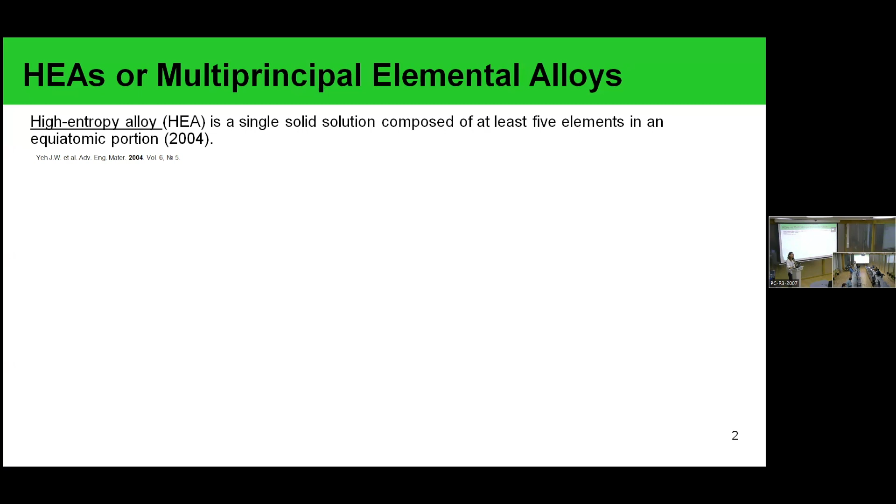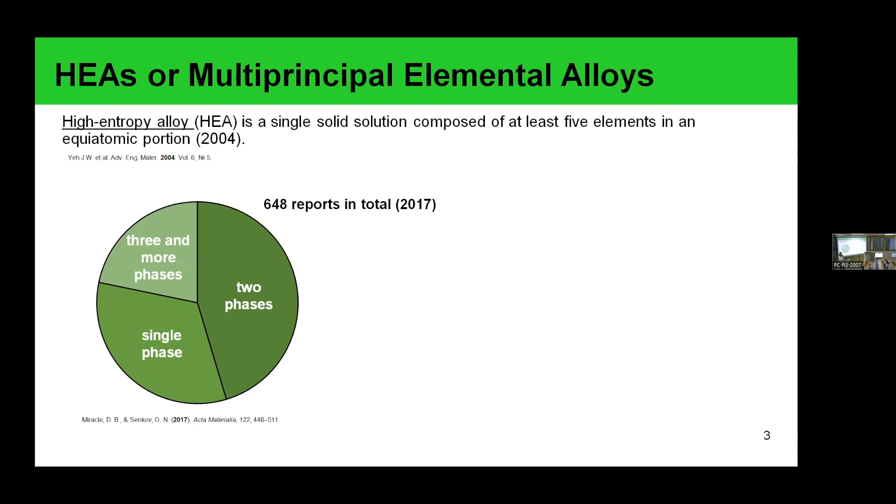Starting from the definition of high-entropy alloys, they were first published in 2004. According to the general definition, these alloys are a single solid solution composed of at least 5 elements in equiatomic proportion. But according to reports reviewed in 2017, there are more than 600 reports demonstrating that these high-entropy alloys contain at least two phases. Today, high-entropy alloys are considered mostly as a new approach in alloy design rather than following the strict definition.

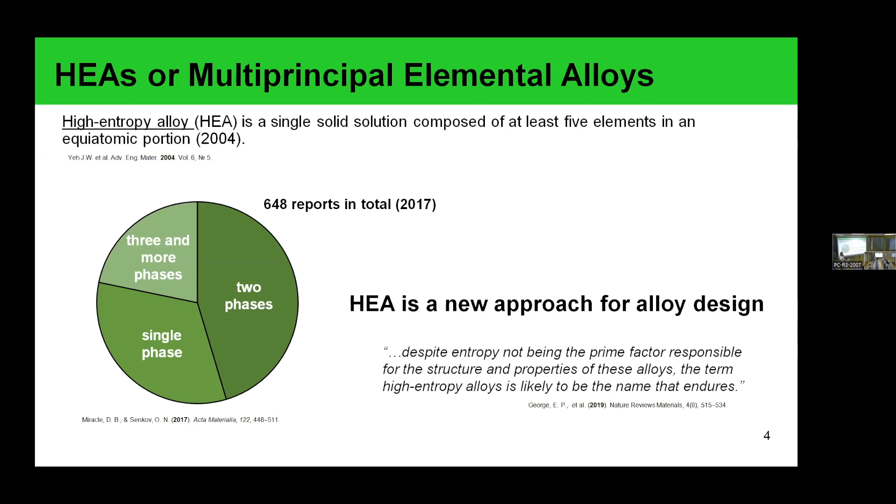Anyway, today there are several compositions which can be considered the most prospective. They can be divided into two groups: single solid solution and multi-phase alloys. In the first group, there is the 5-component system, which was the first published, first demonstrated high-entropy alloy, and the high-entropy alloys with 3 components.

Also, there's a new direction that grew from this field: refractory high-entropy alloys, with refractory elements in their composition, also presented by the group at Belgorod State University, who also used refractory elements in their composition. These are multiple phase alloys. These two alloys demonstrate extremely great characteristics at elevated temperature, but have limited ductility.

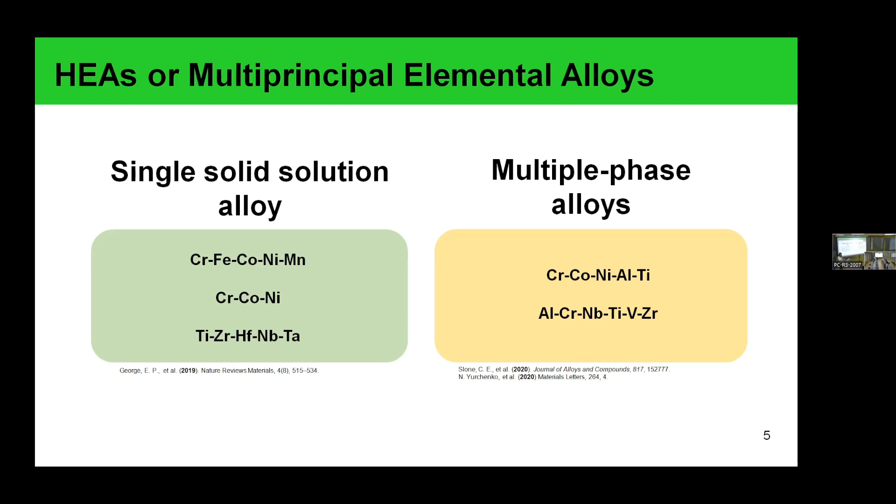So in our study, we're focusing on these alloys, called the CoCrNi or Cantor alloys family, since they contain in their composition elements like chromium, cobalt, nickel, and others. Considering the properties of this 3-component system, we see that this material has really good strength characteristics at cryogenic temperatures, and demonstrates higher strength characteristics compared to the 5-component system at room temperature.

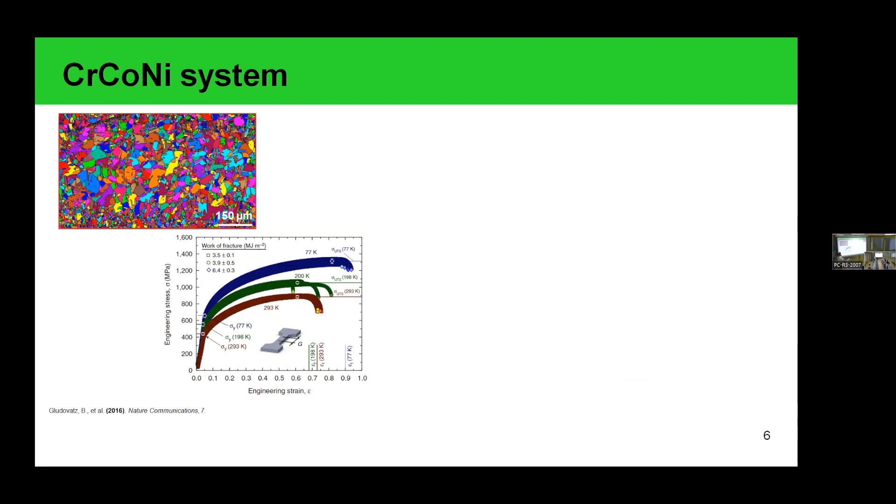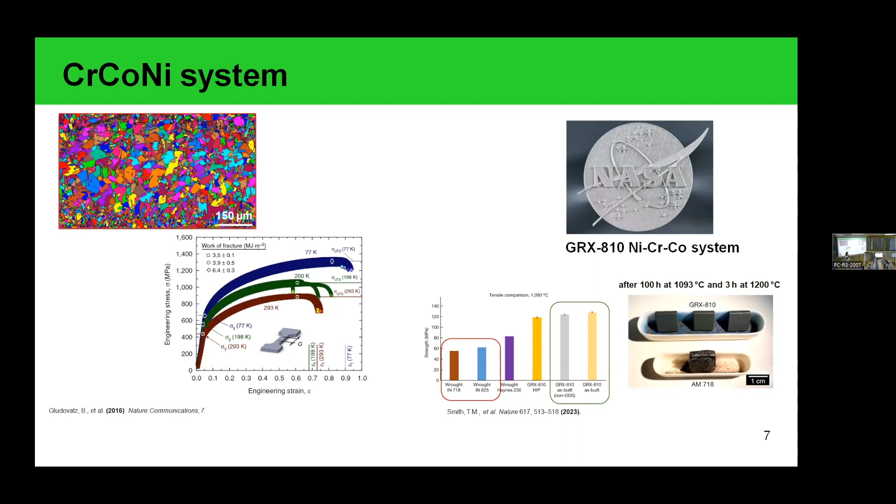Based on this system, this year NASA presented a new alloy for high temperature applications. They prepared pre-alloyed powder and compared the printed material using 3D printers, comparing the oxidation resistant properties with nickel alloys. It demonstrates better oxidation resistant properties, and even the tensile properties at elevated temperatures are higher compared with nickel superalloys.

This alloy presented by NASA also contains other elements, including aluminum and titanium. In terms of specific strength, this material is also a prospective system, since it demonstrates good strength characteristics at elevated temperature.

One publication demonstrated a set of alloys where they varied the aluminum and titanium composition in this system, and showed good strength characteristics but with low ductility. Still, at elevated temperature it shows good strength properties, and they even observed a superplasticity effect.

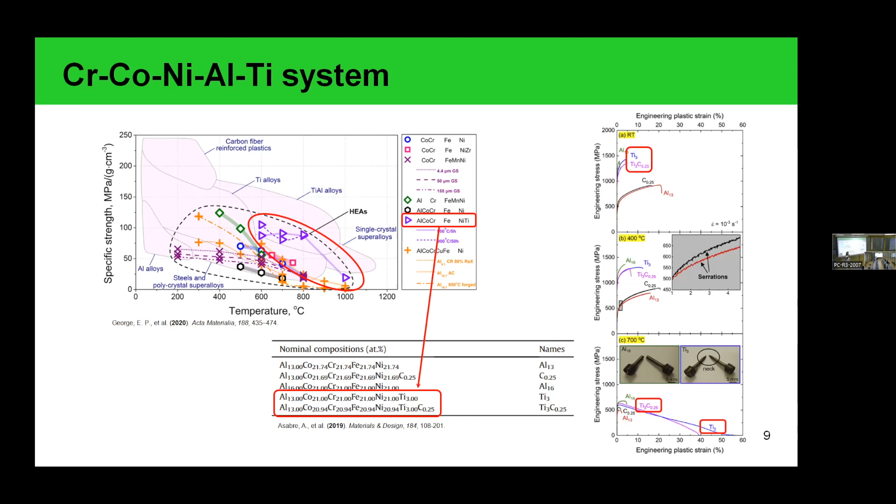In comparison, looking at the mechanical properties of this material across a wide temperature range, we can see how the strength and ductility characteristics evolve with heating at elevated temperature. For the 4-component system, we see a tendency to lose the strength characteristics.

But if we add aluminum, we can stabilize it at elevated temperature and achieve higher strength characteristics if we add titanium to the composition. It demonstrates the same tendency for strength characteristics compared with nickel alloys, and also presents elevated ductility, high ductility at elevated temperature. But it still shows low ductility at room temperature.

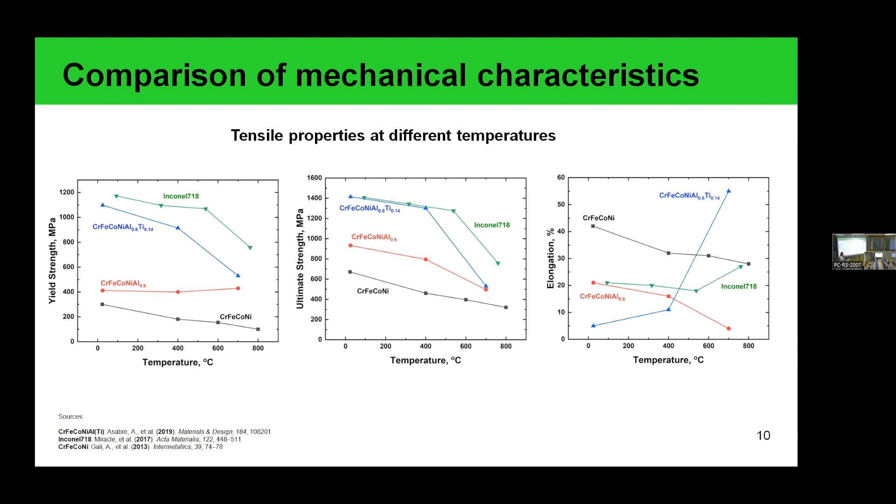This limits their application, so for searching the required composition, there is a combinatorial approach which can be applied to search and optimize these strength-ductility properties of these materials. For this purpose, additive manufacturing can be applied as one of the most appropriate methods. Additive manufacturing is a process that allows producing complex geometry parts while saving materials.

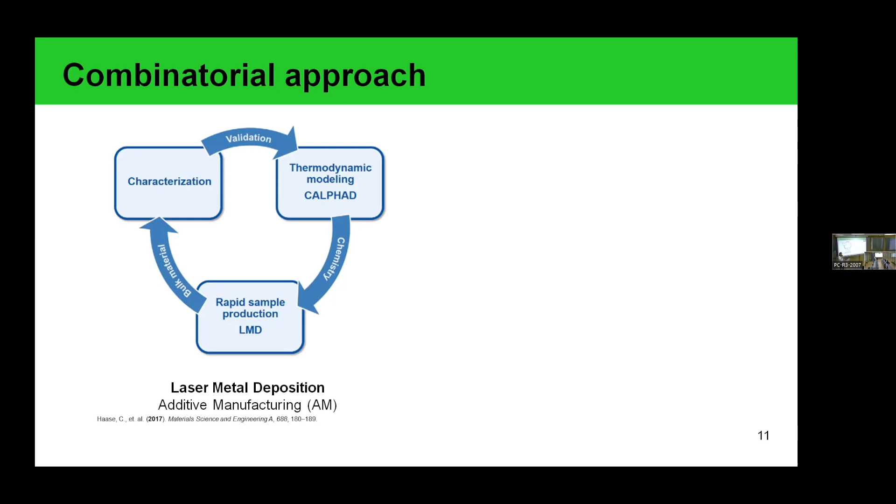But it has its own limitations for application. When we print materials, there are strong residual stresses, and we also know that for some compositions, the chemical composition of the printed alloy differs compared with the initial powder used. Since this technology is actively used in industry, it makes sense to adapt the chemical composition of the future alloy directly for additive manufacturing application.

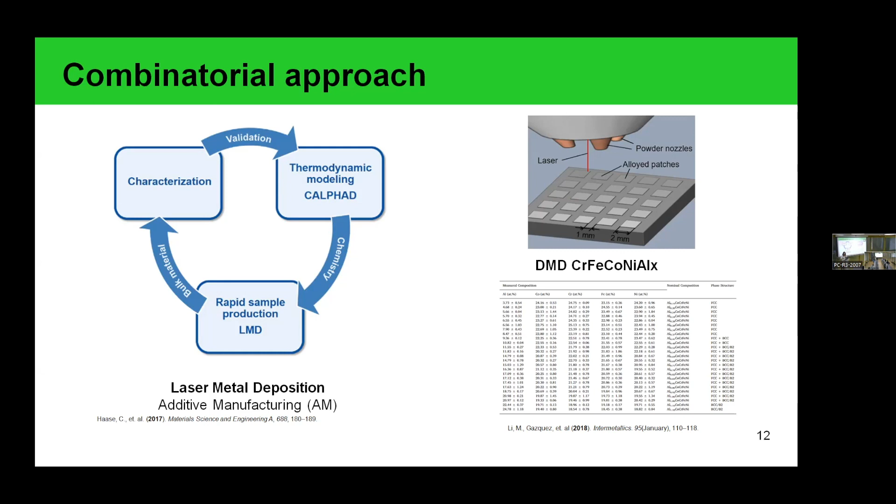There was a work demonstrating a bench of samples, where they varied the aluminum content in each sample and first analyzed the phase composition of these samples, as well as mechanical characteristics. Today there are several metal additive manufacturing techniques.

Material extrusion and binder jetting involve printing solid parts using polymers, but this requires an additional heat treatment procedure afterward to remove the polymer from the solid parts. Sheet lamination applies a laser or heat source to hit sheets of material, and with vibration we weld our sheets of metal.

Only two additive manufacturing techniques, direct metal deposition and powder bed fusion, provide the possibility to fully melt the materials and manipulate the alloy composition.

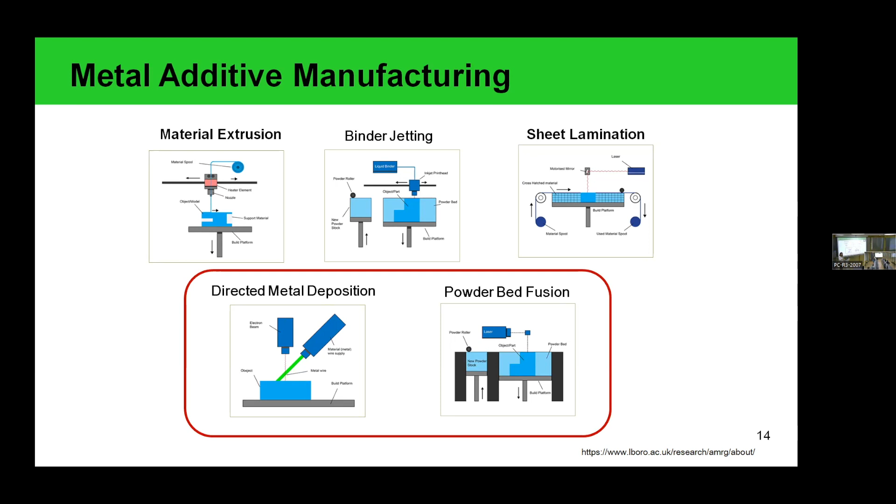The first is direct metal deposition technique. We can use several feeders, so we can simultaneously print with different materials, applying our powder in the same place. We heat it with a heat source, which can be a laser or an electron beam, and this is how we print our solid part layer by layer.

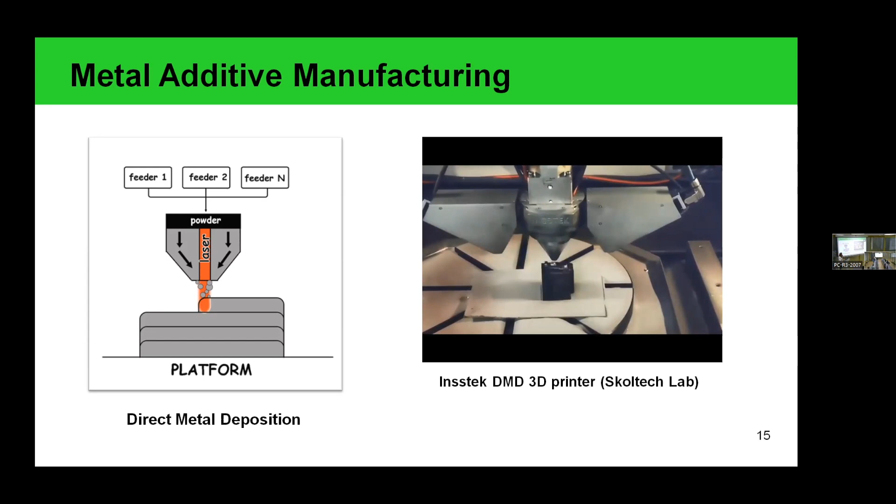Another technique is powder bed fusion, where a thin layer of material is spread on the platform, and according to the digital geometry, we melt the powder.

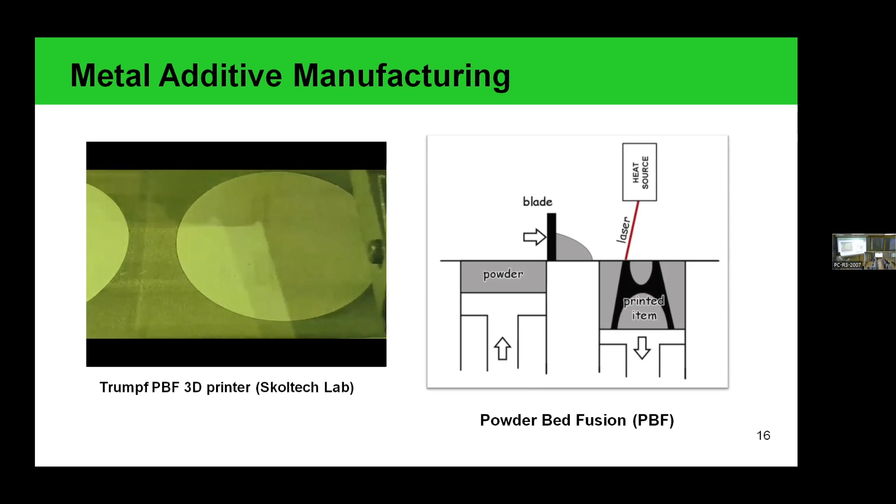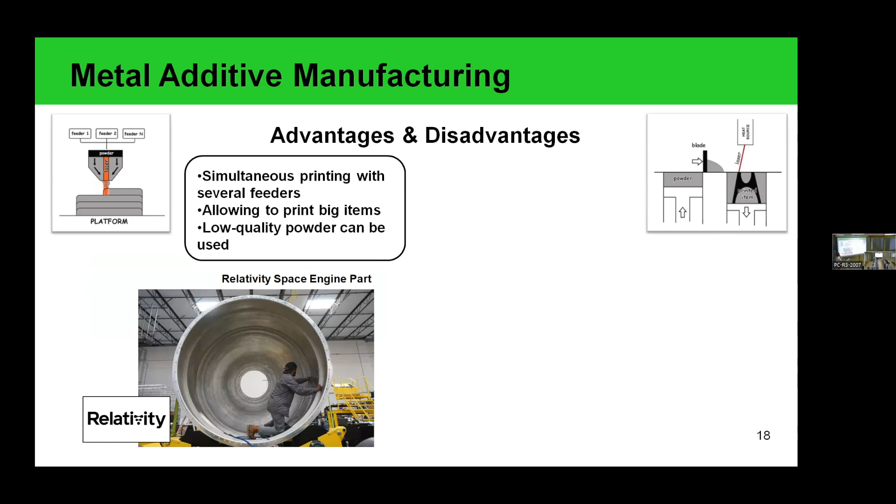There are advantages and disadvantages of each technology. For the first case, this technology allows printing big items and allows printing with several materials simultaneously.

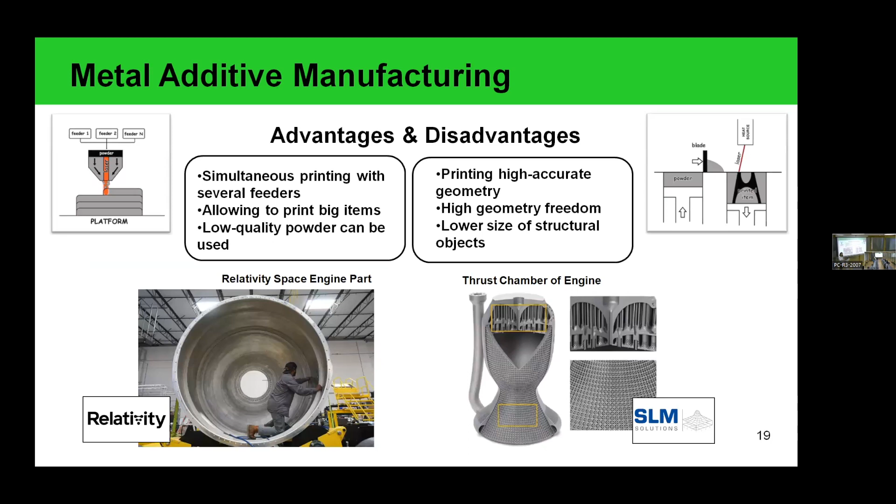In the case of powder bed fusion technology, it provides the possibility to print complex geometry with higher accuracy. Also, specifically for this technology, due to the high cooling rates during the process, we can achieve smaller structural objects. Here you can see austenitic stainless steel, which consists of a cellular structure as a substructure level, where we see these cells surrounded by dislocations.

Also, we see that these cells are not homogeneous, not having a homogeneous element distribution. We also observed small precipitates like oxides at these cell boundaries.

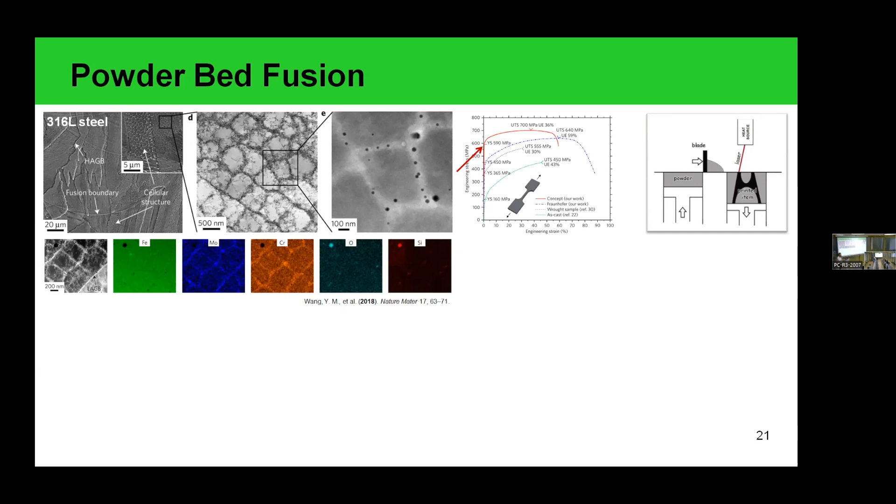For our purpose, we can use this cell structure, which provides higher strength characteristics for these additive manufactured materials. To improve the strength properties, we can adjust this approach using the in situ alloying printing process, and achieve the result.

Then the secondary phase forms on these grain boundaries, contributing to the strengthening effect. Here we present work on alloyed austenitic steels with boron nitrides, where new phases form around these cells. Another work demonstrated the possibility of in situ printing with powders of a 4-component system and aluminum, where the secondary phase is observed on these cell boundaries.

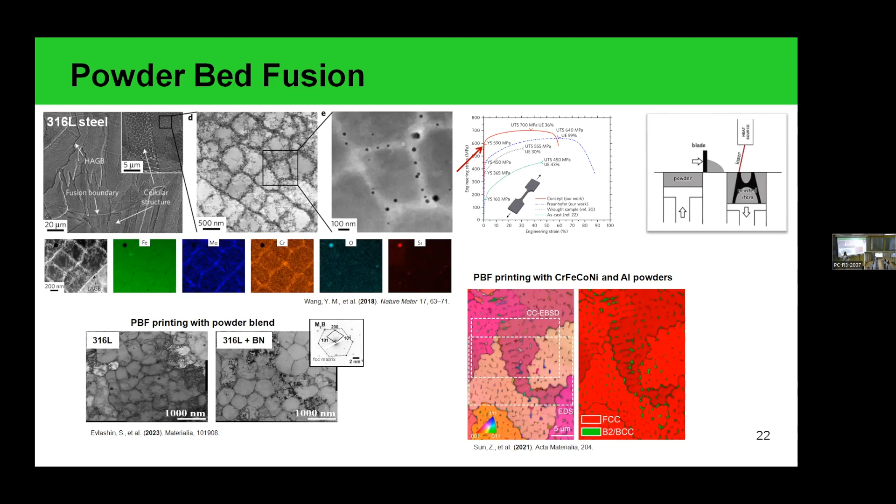So the aim of our work is to investigate the structural and mechanical properties of this 4-component system produced with powder bed fusion technique, and try to improve these characteristics using in situ alloying with aluminum and titanium. At the first stage, we found the required printing parameters for our 4-component system, analyzed the structure, and also analyzed the further post-treatments and how they affect the structure and mechanical behavior of our materials.

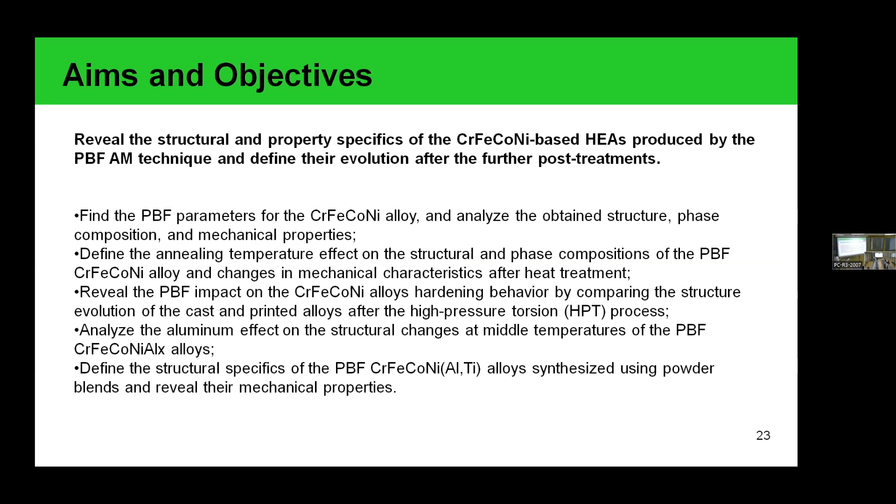On the next stage, we add aluminum to our system and analyze the structural distribution and phase distribution in this material. In the last stage, we observed the properties of the material alloyed with aluminum and titanium.

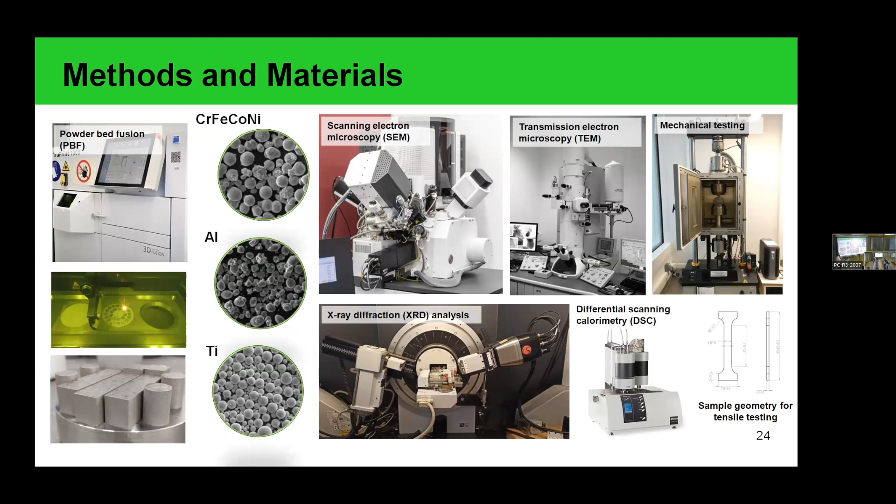For this purpose, we used powder bed fusion 3D printers, 3 types of materials - the 4-component system, aluminum and titanium - several microscopy techniques, X-ray diffraction analysis, and a mechanical test machine to analyze the mechanical properties of our materials.

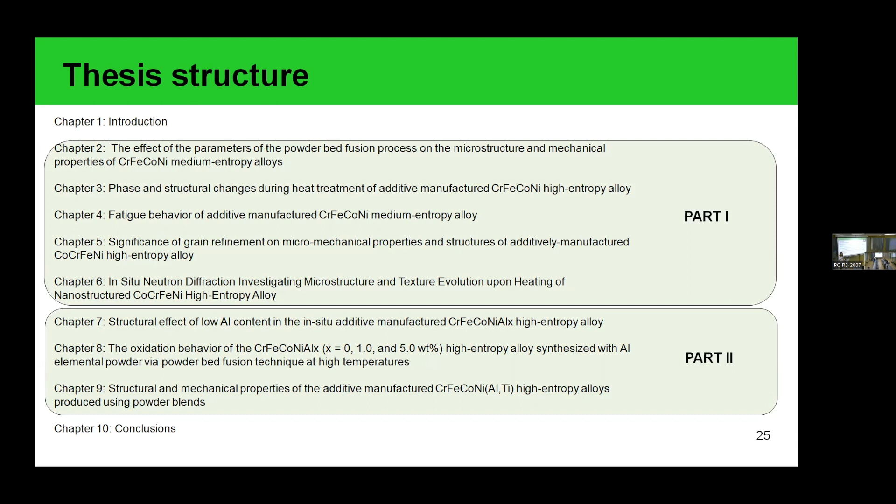The thesis structure can be divided into 2 parts. The first part focuses on the properties of this 4-component system, and the second part demonstrates the properties of the in situ alloyed materials. So coming to part 1.

In the first stage, we observed the morphology and quality of the powder, and we see that the particle distribution is quite good for the PBF process. The element composition, according to EDX analysis, demonstrates approximately equiatomic portions of each element, but the purity is about 99.7% with 0.1% nitrogen.

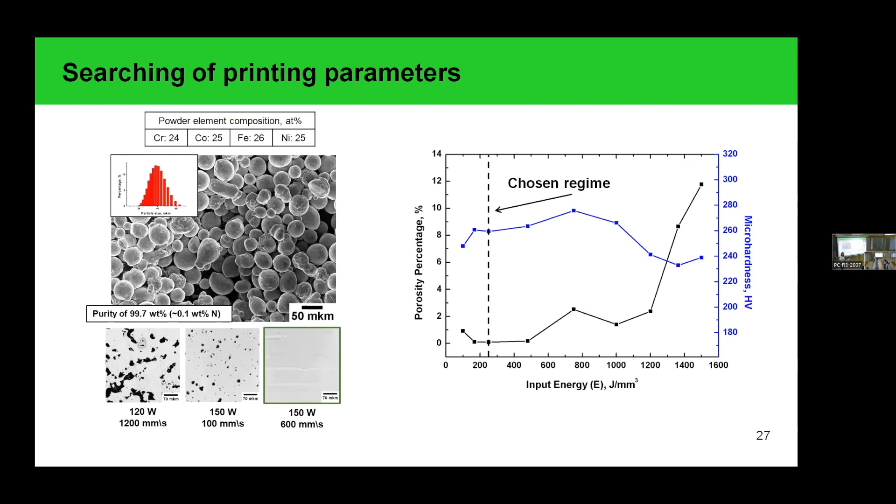We prepared a set of samples where we varied the laser power and laser speed. Based on the results of porosity and micro hardness, we chose one regime and continued work for these materials mostly with this set of parameters.

The structural analysis revealed the typical face-centered cubic structure for these materials, with elongated grains about 50 microns in the longer side, related to the size of the laser spot diameter and the distance between laser tracks. We also observed a cellular substructure with a size of about 0.5 to 0.7 micrometers.

The analysis of chemical composition demonstrated approximately homogeneous element distribution. X-ray diffraction analysis demonstrated the presence of the face-centered cubic structure only, and also, which is typical for additive manufactured materials, a strong texture along the building direction.

On the next stage, we analyzed the mechanical characteristics in a wide temperature range of our materials in the as-built state and also in the annealed state, since annealing is a common post-treatment for additive manufactured materials due to the strong residual stress in this material.

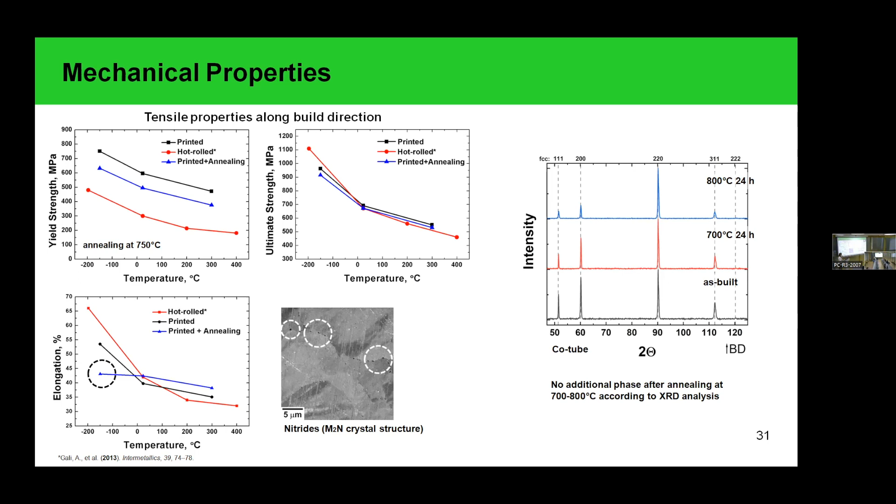We analyzed the properties of our material under cyclic load and observed, as usually seen for additive manufacturing materials, that machined samples show better, higher fatigue life when near-surface defects are removed. For unmachined samples, we see a difference between as-built and annealed samples.

Analyzing the fracture surface of these specimens, we see that for the as-built materials the fracture surface demonstrates brittle fracture, while for the annealed materials, ductile behavior is observed, which is associated with residual stress removal.

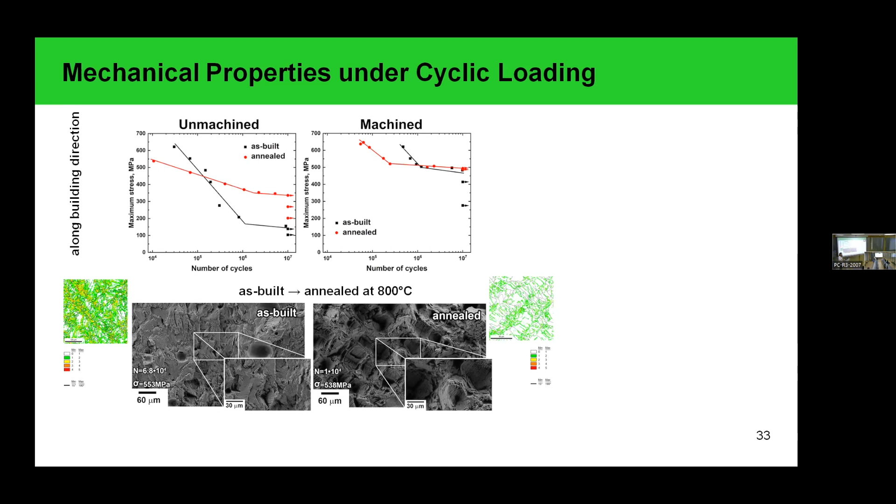But back to the machined samples — as I said, the main contributor to the fatigue life is the formation of near-surface defects. At near-surface zones, the volume of defects is higher compared to the inner printed material. So it's essential to adjust the scanning strategy, or simply remove these defects, to increase the fatigue life of the material.

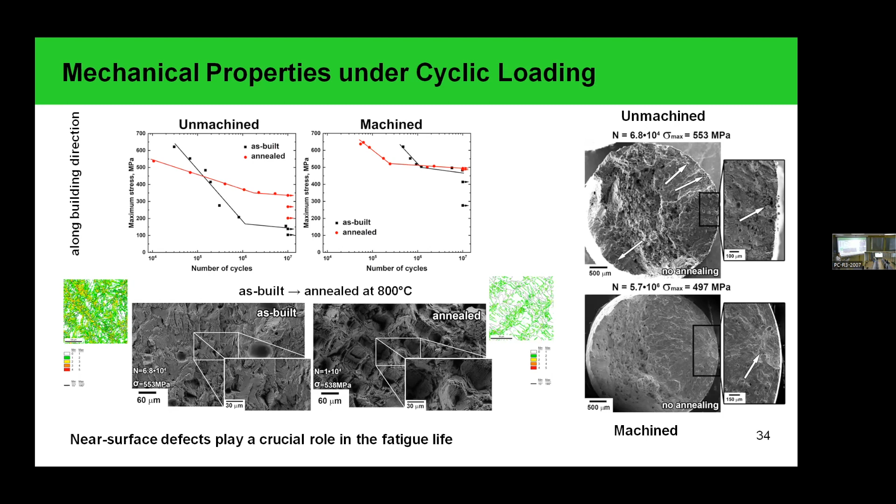On the next stage, we decided to analyze the effect of heat treatment on material behavior. We annealed our materials for 24 hours at different temperatures, starting from 400 degrees Celsius up to 1000 degrees Celsius, and observed a drop in microhardness after annealing at 700 degrees Celsius.

Differential scanning calorimetry demonstrated an endothermic peak starting from 400 degrees Celsius, with additional peaks around 500 and 600 degrees Celsius. The beginning of these peaks is associated with the onset of point defect migration.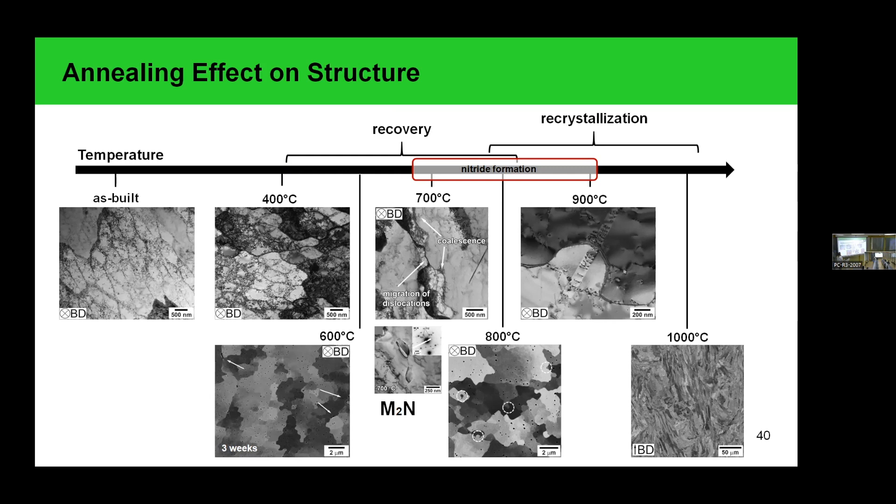Even after long heat treatment, like 3 weeks, we see the formation of new phases on the grain boundaries, even after annealing at 600 degrees Celsius. But interestingly, we see stability of the cell structure at this temperature.

We also investigated the effect of intensive deformation processes on material behavior, using high-pressure torsion. This technique allows use of small material pieces and achieves high deformation without losing material. The results of this work demonstrate how the properties of our additive manufacturing materials can be improved through grain refinement techniques, considering further application of these materials in harsh environments.

Here you see the evolution of grain size from the as-printed structure. The size of the elongated grain was about 50 microns, and after 8 turns it was about 90 nanometers. We also observed hardness saturation in these materials.

We observed that it was the same as for the as-cast materials, approximately with the same number of turns or strain deformation level. Here it's like 4 turns for our materials, and 5 for the as-cast materials. Also for our materials, we observed the face-centered cubic structure only, even after 8 turns.

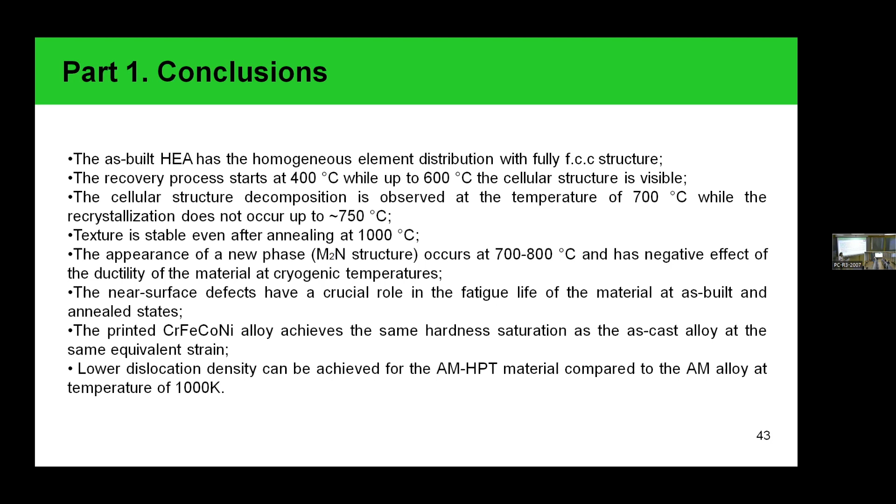So here are the main conclusions for part 1. I want to highlight that according to our observation, we observed only a face-centered cubic structure in as-built materials, and no additional phases except nitrides, associated with impurity of the powder, was found, like sigma phase or other. And the near-surface defects have a crucial role in the fatigue life of our material.

Coming to part 2, alloying our system with aluminum and titanium, we start from small aluminum addition to our 4-component system. We also prepared a set of parameters where we applied different laser power and laser speed. An interesting observation is that even small aluminum addition leads to lower porosity for all the considered regimes which we printed.

But XRD analysis demonstrated formation of the FCC phase only, though we observed shifting of the peaks, which can be interpreted as incorporation of aluminum atoms into the crystal structure. Still, if X-ray observation demonstrates a single solid solution, we see zones enriched with aluminum, which suggest there is inhomogeneity in the chemical composition and in properties.

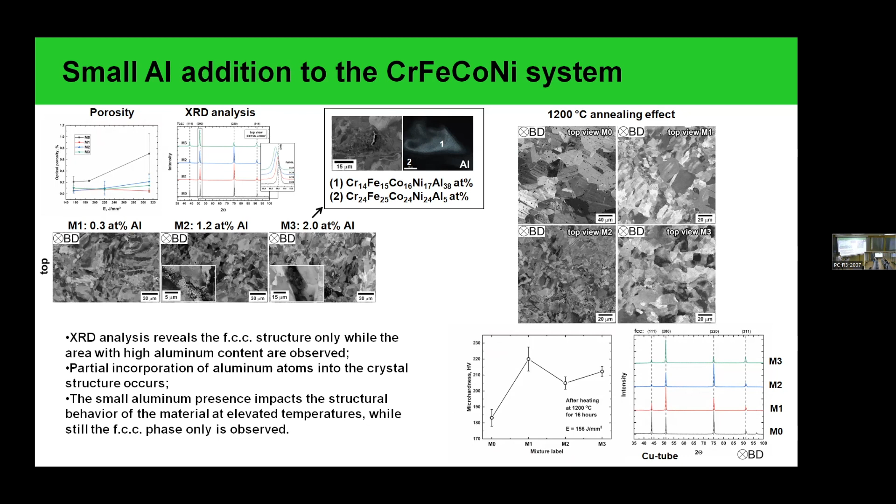We also observed these twin-like objects in the materials. Also, we see that the microhardness drops not as significantly as in case of the 4-component system, but still, according to XRD observation, we see the face-centered cubic structure only. For application of this material at elevated, high temperature, it's essential to understand the oxidation resistance properties of our material.

For this purpose, we presented three types of alloys: the first without aluminum, the second with small aluminum addition, approximately 1%, and 3% aluminum addition - smaller and higher aluminum content in our materials. In case of oxidation behavior at 800 degrees Celsius, we see a difference for samples with and without aluminum, where we see faster kinetics for our materials.

But this can be related to the delamination process, which is clearly observed at 1000 degrees Celsius, when we see the loss of weight of our materials containing only four elements. But in comparison, for the samples with smaller and higher aluminum addition, we see that the kinetic observation for the material with higher aluminum content is higher.

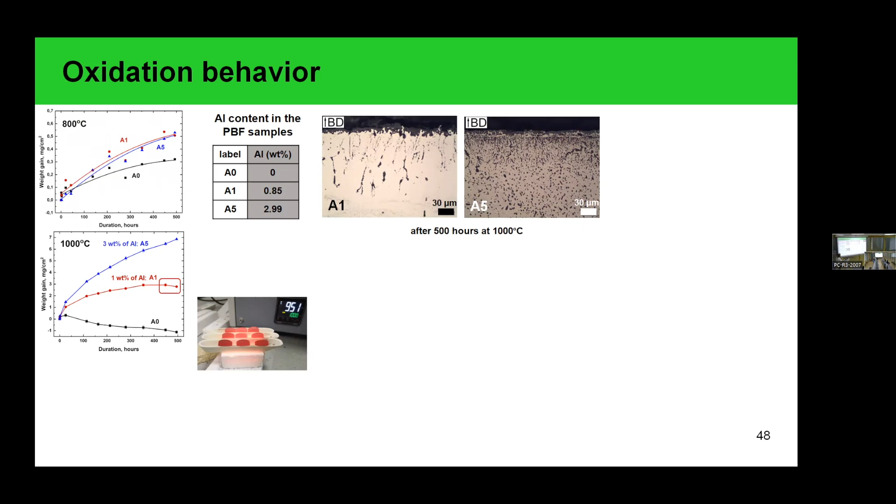So this can indirectly represent the delamination of our material, which we didn't observe visually. But in case of the material with higher aluminum content, we see the complex chemical composition of the near-surface defect. For these materials, the initial powder contained 1% manganese, and we see formation of manganese oxide as the first oxidized layer, and under this layer we see chromium oxides on the surface - the formation of chromium oxide on the surface.

It's related to the result from the X-ray diffraction analysis. Under this layer with chromium and manganese, we observed the formation of alumina, which generally prevents further penetration of oxygen into our structure and delamination of the material. We see zones enriched with alumina, but under that zone, we observe enrichment with aluminum and nitrogen, which also demonstrates the effect of nitrogen, present in the initial powder at only about 0.5%, on the material behavior at higher temperature.

We observed the same thickness of these zones for the front view and the top view. So the oxidation process for the additive manufacturing materials occurs homogeneously.

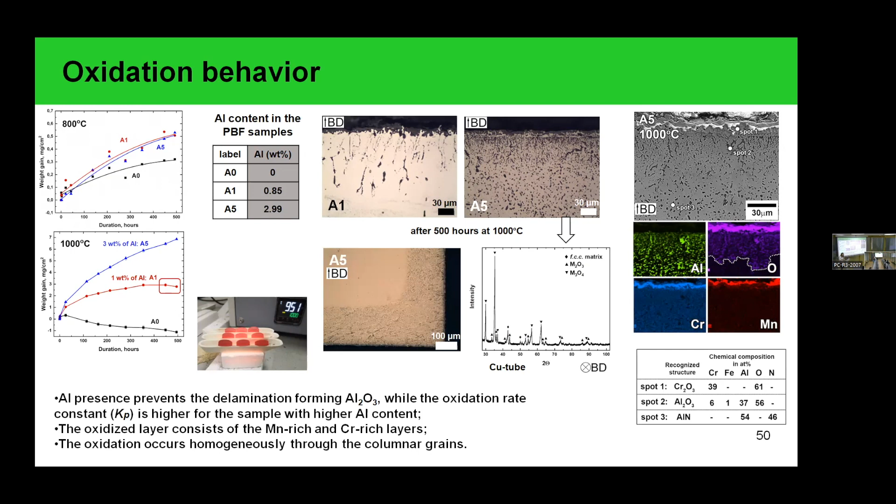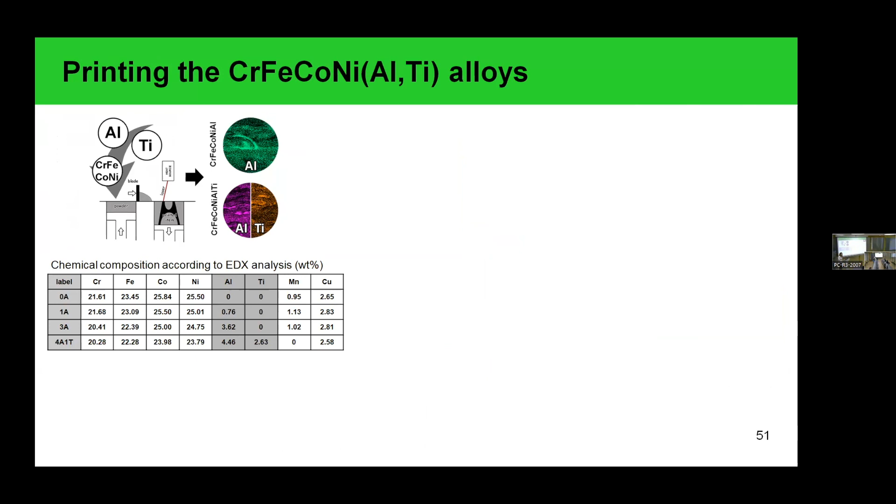In the last stage, we analyzed the properties of our materials alloyed with aluminum and titanium. We compared, mostly focusing on the materials with higher aluminum content, like 3.5 aluminum, and aluminum with titanium, in comparison with the small aluminum content and the 4-component system.

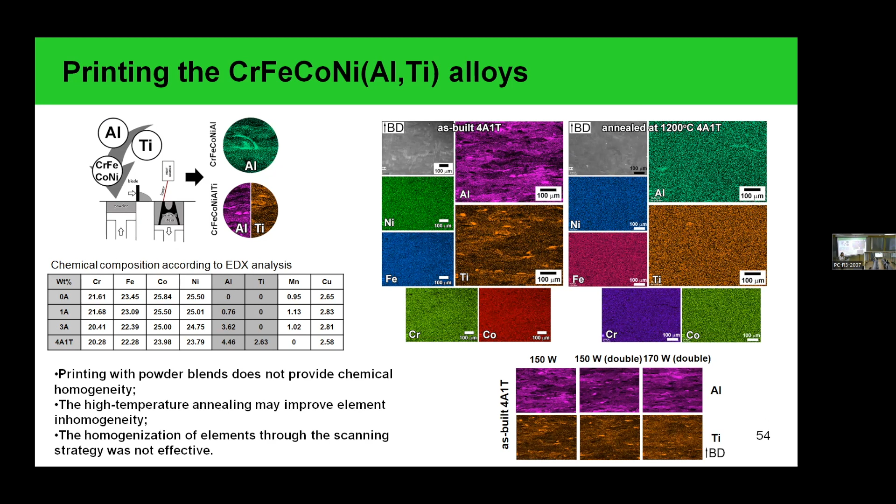As was the case with small aluminum addition, for the materials with aluminum and titanium we observed strong chemical inhomogeneity of our materials. Again, annealing at high temperature can improve this chemical homogeneity. But scanning process variations, like higher laser power or double scanning, don't provide appropriate results—we still see inhomogeneous element distribution in our material.

Analyzing the structure, we wanted to achieve the idea that we can form an additional phase on the cell boundaries, and this can be reached with annealing at 800 degrees Celsius for a short period of time, like 30 minutes. Longer annealing leads to the disappearance of our cell structure and the formation of new phase boundaries.

For the material printed with titanium, even after short heat treatment we see plenty of phases formed during the as-built state and during heat treatment. X-ray diffraction analysis demonstrated that with small aluminum addition, no changes are observed compared to the four-component system. With higher aluminum content at the as-built state, there are small percentages of a new phase, not with high volume, but this secondary phase stabilizes during heat treatment.

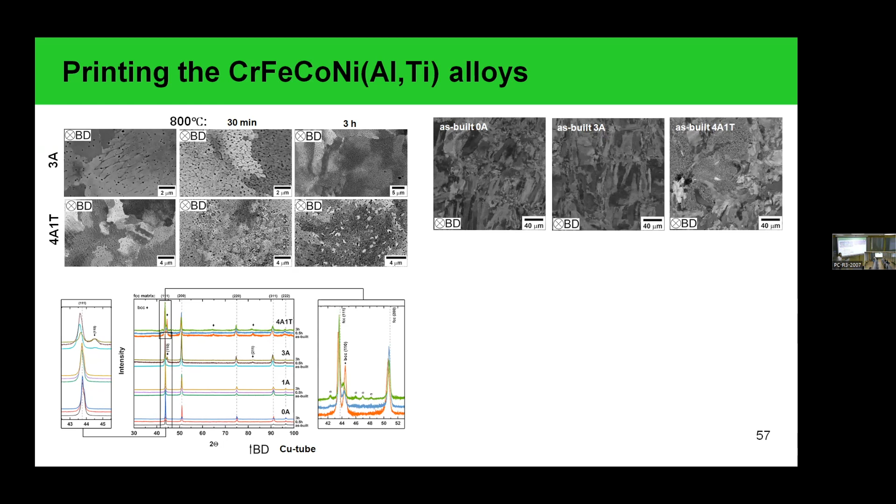Analysis of these zones after heat treatment demonstrates that the small grains consist of BCC and FCC phases—small-sized grains of these two phases. For the material with aluminum, we see the formation of new phases within already formed grains. To explain this phenomenon, we prepared two phase diagrams, one for the material with aluminum and one for the material with aluminum and titanium.

We observed a difference: for materials with aluminum only, from the liquid we see the formation of only FCC phases, and only afterward does BCC form from these solid FCC phases. For the material with aluminum and titanium, we see simultaneous formation from the liquid of two phases, BCC and FCC, which explains the small grains of these two phases in the as-built material.

So, analyzing the tensile testing results of our material—presented only for room temperature—we see that in the as-built state, the materials of the four-component system and with aluminum demonstrate approximately the same strength characteristics. Only after heat treatment at 800 degrees Celsius for 30 minutes do we see an increase in strength characteristics for the materials with higher aluminum addition.

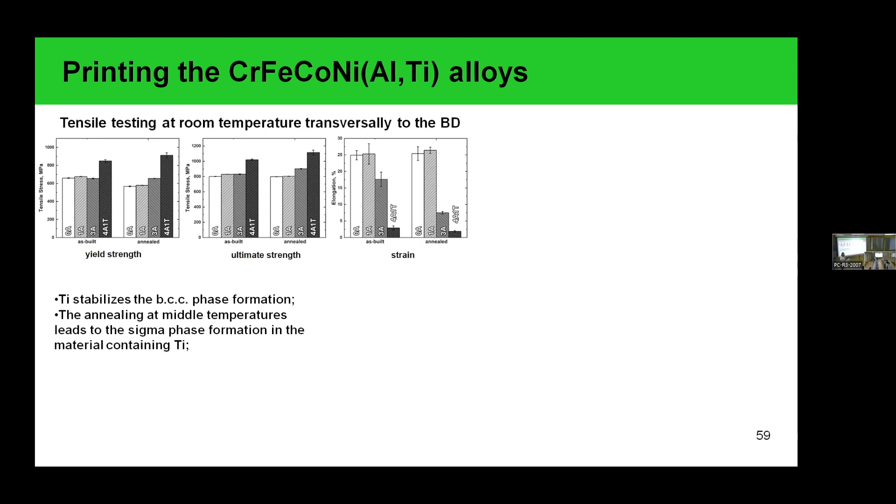But this also demonstrates a drop in ductility. The same material shows a drop in ductility at the as-built state, with further loss of ductility after annealing. For the material with titanium, we see an increase in strength for the as-built material, and with further annealing an additional increase in strength, but we totally lose ductility even at the as-built and annealed state of our material.

Analysis of the fracture surface of our samples demonstrated the brittle zone, which is associated with the brittle BCC phases. Also for the titanium-containing materials, we observed hot tearings in the as-built material.

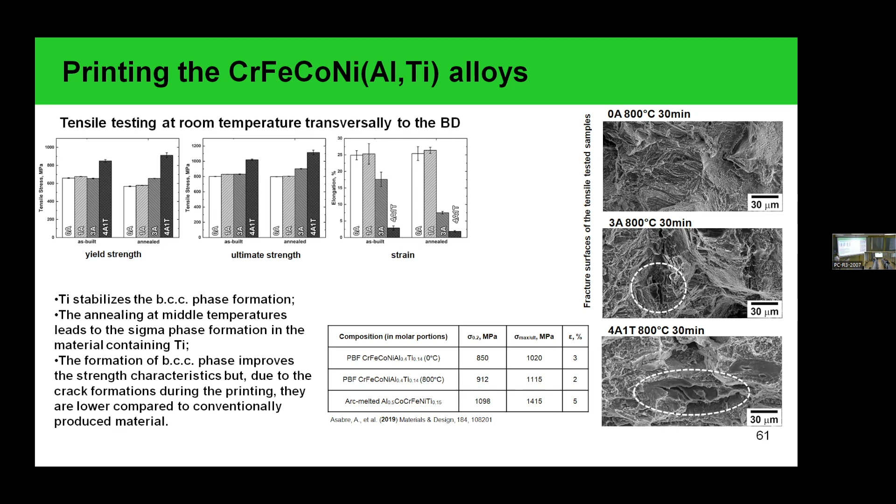Comparison of our results with early published work, which presented mechanical characteristics for an arc-melted composition with approximately the same chemical composition, shows that we still have lower ductility in our material, even lower than for the arc-melted material, and also lower strength characteristics compared to arc-melted materials. This can be a result of the hot tearing tears formed during the printing process, and it's a challenge for the further application of this in-situ printing approach, since several phases form in the printed material, making it inhomogeneous. This should be solved.

So here's the conclusion of the second part, but I would like to mention the general conclusion of the work. First of all, this work demonstrated that for this four-component system we observed typical behavior for FCC materials, so the solutions which already exist for other FCC materials can be adapted for further work with this system.

Also, we observed that nitrogen, even at the smallest content, affects the structural and mechanical properties after heat treatment at elevated annealing temperatures. So the purity of the material is a key factor for application at elevated temperatures.

Talking about alloying our four-component system through printing using powder blends, generally we can conclude that it's possible, and it's possible to improve the homogeneity by applying high temperature annealing. But we observed the challenge that due to this chemical inhomogeneity, or due to the specifics of this composition, several phases form, which limits further application and demonstrates lower mechanical characteristics than conventionally produced materials. So this is also a challenge which should be solved in the future.

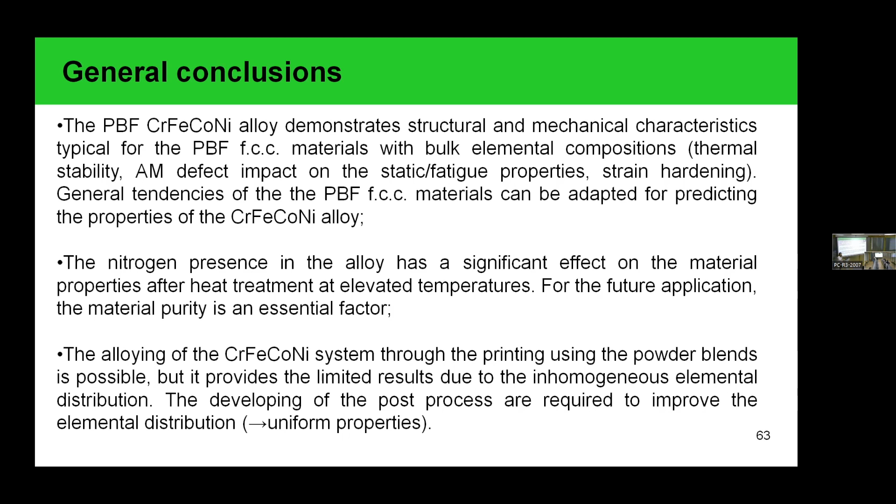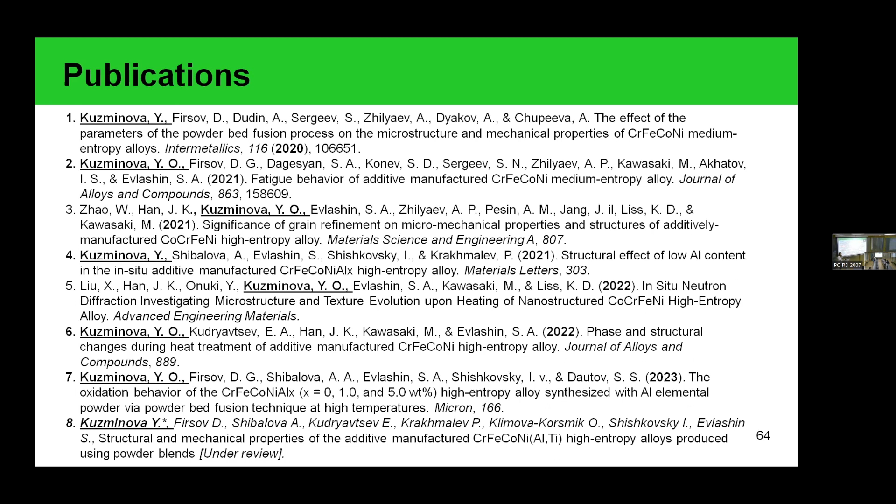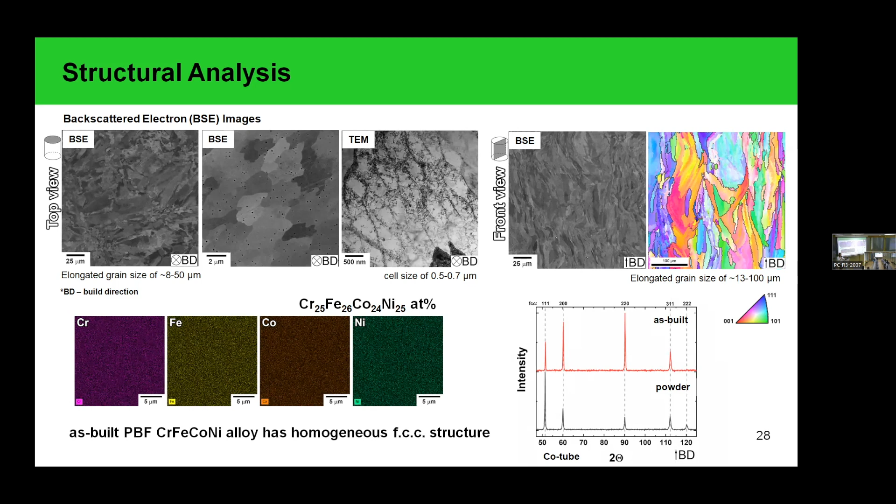But why do you focus on nitrogen only? Because I guess each impurity has its own effect. Because we see the difference in mechanical characteristics, and only after annealing, during the annealing, do we see the formation of nitrides around the grains. So we assume that it contributes to the mechanical properties of our materials. That's why it's important. If possible, we could remove the oxides in the as-built material, and that would contribute similarly to the properties at both as-built and annealed states. It's possible to minimize formation of oxide at the as-built state by using another quality of powder, but generally they are formed during the printing process, and at the moment we can't deal with the formation of these oxides. How much the effect on properties of this material is, it's challenging to estimate, since oxides will anyway be formed at as-built state, annealed state, or otherwise. That's why I focus on nitrogen, because we see this nitrogen effect only after elevated temperature - we do not observe this otherwise.

We observe this oxide at as-built state and at elevated temperature, showing a decrease in characteristics for the as-built material.

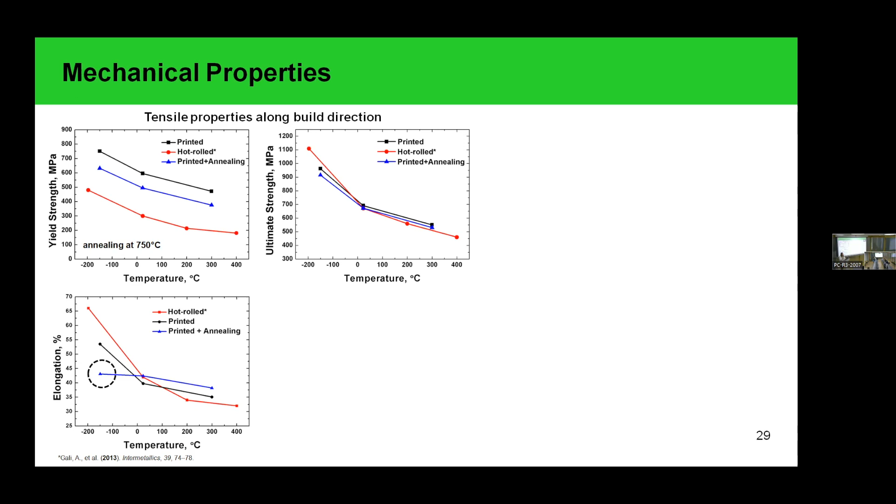Because at room temperature and higher, there are different deformation processes in the materials. At room temperature and higher, the materials deform via dislocation slip. At cryogenic temperature, this mechanism is blocked, and instead twinning deformation is observed in these materials at lower temperature. For this type of deformation, the formation of brittle nitrides on the grain boundaries is possibly more important than in the case of slip dislocation.

Thank you. Another question concerns high pressure torsion. I didn't hear your explanation today - why do you skip usual deformation methods like rolling or upsetting, and make a huge step directly to severe plastic deformation?

Because in the case of rolling or other processes like cold rolling, cold forging, or hot forging, we are limited in the deformation level, since each time it's technically challenging - as I remember, I tried it. With high pressure torsion, it's easy to achieve higher deformation just by increasing the number of turns.

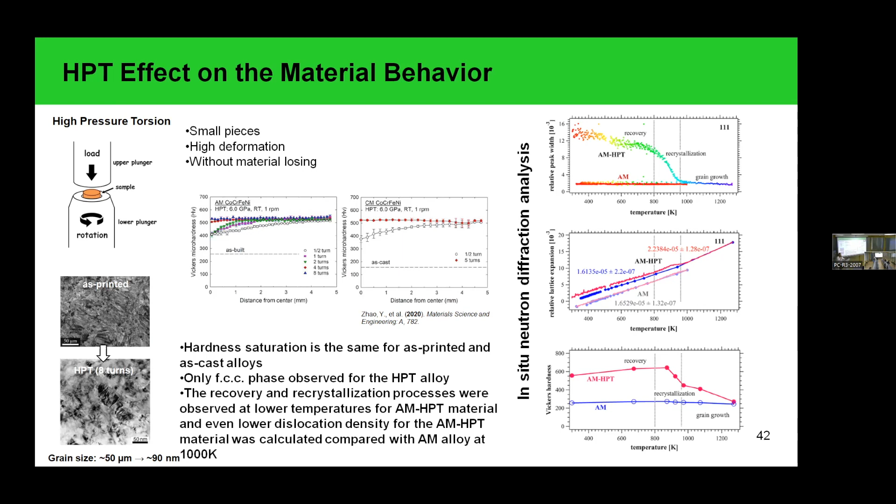Okay, thank you, and the last question. In your opinion, when using powder blends, is there an effect from the melting points of each certain metal or powder, since you try to use titanium and aluminum which have quite different melting temperatures? Is there an effect on homogeneity of distribution of those elements in the structure?

In powder blends, we have a mix of 3 powders. But in the as-built materials, even if we observe inhomogeneity - chemical inhomogeneity - we do not observe zones which are fully titanium or fully aluminum material. So this inhomogeneity is anyway related with the phase difference also in the material.

Generally it can affect, for example, it should affect the melting process in the material. So the printing process should be adapted specifically for this material, because we can see this in the case of the 5-component system with aluminum in comparison with the 4-component system.

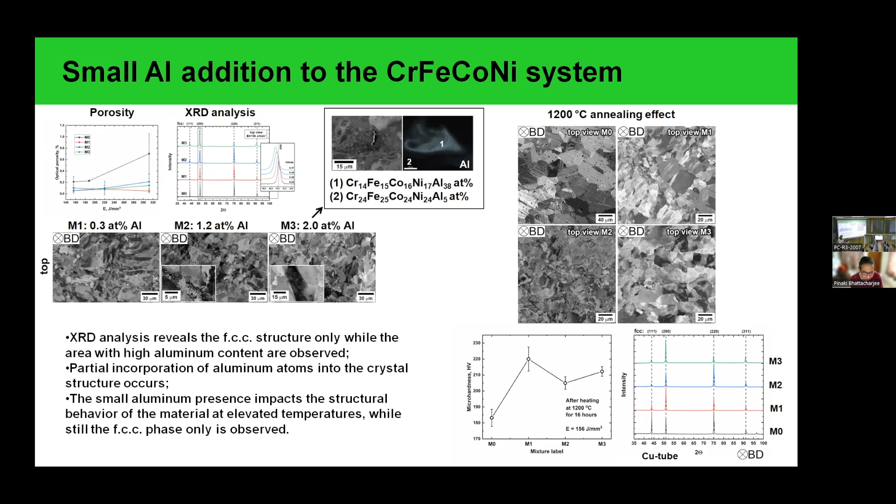Okay. So in terms of the chemical composition, you have determined the chemical composition, which shows that it is nickel and aluminum rich, right? You commented yes, that it is nickel and aluminum rich.

Okay, so just one question: there may be a lot of difference in the behavior of your alloy, because normally the B2 phase in such systems is quite hard and brittle compared to your soft matrix. So I'm just wondering, particularly, of course, it depends on how much B2 phase formation is there. So can you please give some quantification of the fraction of the B2 phase that has been formed, because I might have missed that point - what was the fraction of the BCC or B2 phase formation? Can you please comment?

Yes, and here again we need to address the challenge of this way of performing this material analysis.

In case of the X-ray diffraction analysis, we can see there are small peaks which can be associated with approximately 5%, but the problem is that in additive manufacturing material we have a strong texture, and actually we can't directly calculate it from the X-ray diffraction analysis.

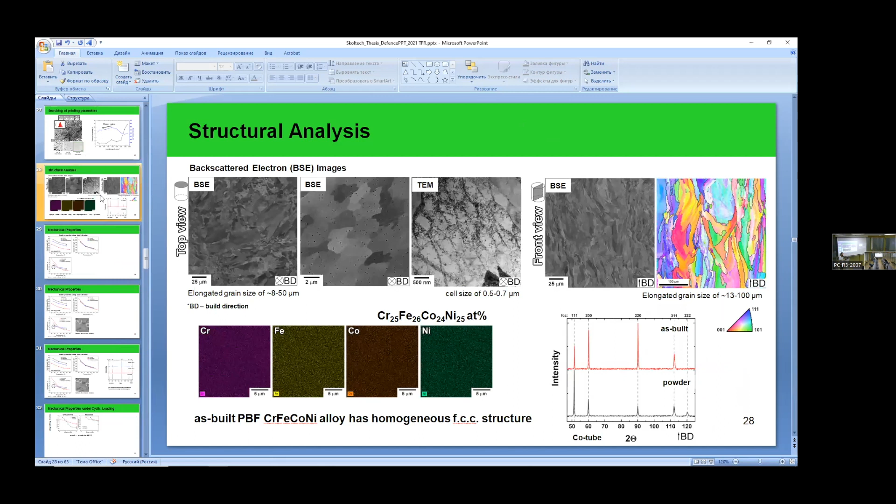If you go to slide number 27... yeah, 27... one more... yep, this one. So I observed that you plotted porosity, input density, input energy, and micro hardness. And I noticed that at around 700 or 780 joules per mm cube, the data point of porosity appears to be very porous, but it also has very high hardness. So why is the hardness also high along with the porosity?

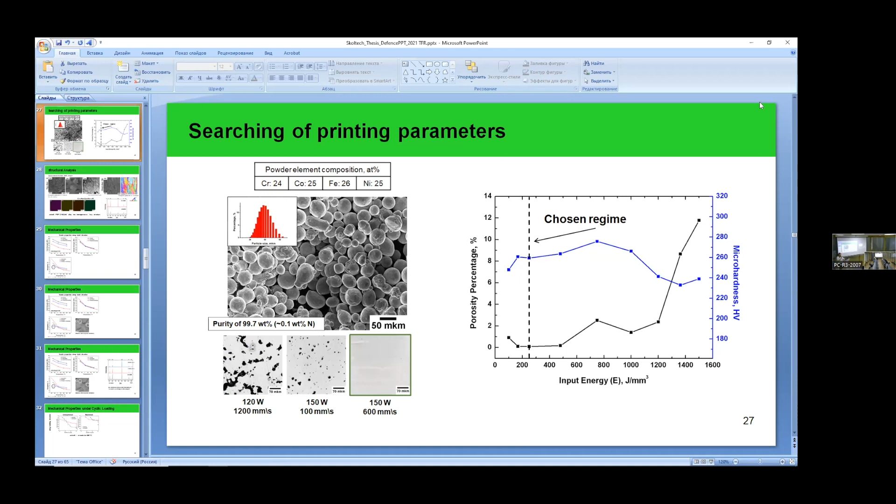It can be the result of higher energy. It's possible that when we increase the energy of the laser or input energy, the nature of the porosity changes and the material is boiled. But in this case, maybe we achieve a higher cooling rate, and that can affect the structure. But actually, unfortunately I didn't add the error, so I'd say it's not really a big difference in this case, it's approximately the same anyway.

We have higher error for the additive manufacturing materials in the as-build state, since the microstructure is very non-uniform and we have elongated grains like 50 microns, and between these grains we see a finer structure with grains less than 10 microns, which contributes to higher error. In this case it can just be part of that error.

So also, where do you take these measurements? Do you take it along the build direction, on top of the sample? On the top of the sample. So on the build, we even polished without removing the samples from the platform, then estimated the position of the samples with optical observation, before going to the micro hardness testing machine.

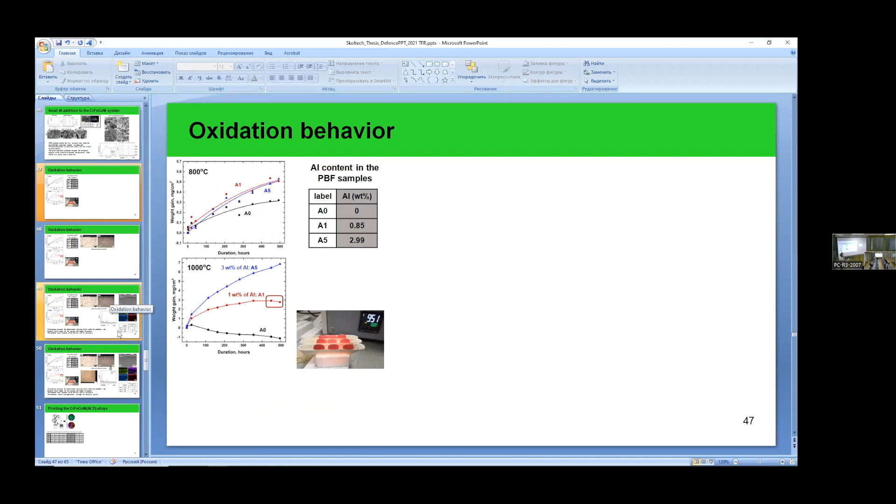But what happens at 1000 that delamination occurs? Because I guess the products of oxidation are similar at 800 and 1000, right? Yes, but the oxidation process goes more intensive, so it's more visible in case of 1000 degrees Celsius, where we see the formation of this chromium and manganese oxide, and the last one typically delaminates from the material.

So we need to prevent the further formation of this material. Okay, so like there is some misfit that grows, right? The misfit of the oxide layer and the specimen is increasing at 1000 degrees Celsius. Yes, which is causing this delamination.

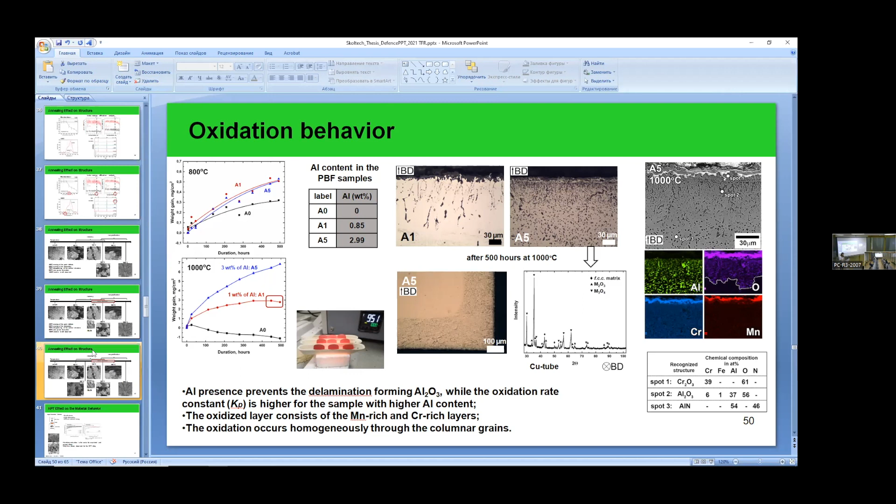Okay, I get that. Okay, and slide number 42. Sorry, let's go with that. So HPT, yeah, so this one. So here you measured the grain size and the hardness, right?

There are two things. Now, I would assume that at the center of the pellet you have there will be very different grain size, or was it the same as that you find at the edge? For the HPT process, no, it's quite homogeneous grain after 8 turns. And we see it's in accordance even for the micro hardness response.

For the first stage, this TEM image was presented in the middle of the radius, but generally we conclude that it's approximately the same grain observation for the whole sample, since we observed the same micro hardness response. So you saw micro hardness the same along the radius? Yes, but the images we presented only on half of the radius.

Okay, and did you also look at the stress state during high pressure torsion? What is the stress state of the sample? Because you have a high pressure being applied around 6 GPa, is that right? And you are doing these turnings, right? So what is the stress distribution? Do you see it being homogeneous all around, or do you see higher shear stresses compared to normal? Of course normal stresses are not going to change the plastic deformation aspect, but where is the maximum shear stress that you observe?

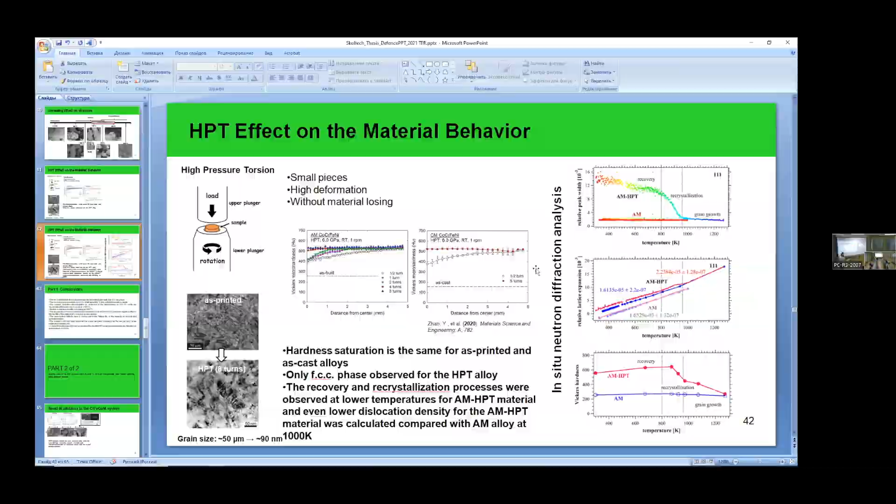So like the shear stress along the cross section of the material, it should vary, right? Because your center... Yes, but after the specific number of turns, there are still inhomogeneities. The strain or stresses can be homogeneous. At the beginning, the higher deformation is achieved at the periphery, at the corner, yes. But in the center, it can be achieved with increasing number of turns.

And that is because of what, do you think? Why does it become homogeneous? Because we still have a small deformation level even in the center, but it's not so high as at the corner of the samples, for example after 1 turn. But even after several turns, we can achieve a strain level similar in the center. It will be similar as, for example, after 8 turns as for material after 2 turns at the end of the sample.

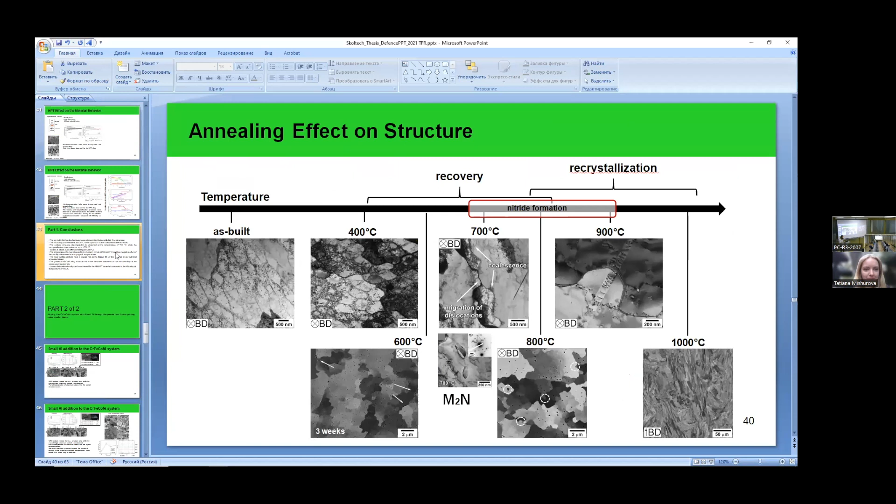Thank you very much, Yulia, for a nice presentation and really amazing work. There's already been a lot of questions, so I will try to be fast. Maybe go to slide 33. 33? 23? A bit more about fatigue. 33, sorry. Yes, thank you, or 34 better.

Okay, next one. Yes, I was wondering which near-surface defects you meant, and why there's more near-surface defects in unmachined samples, and how they're produced.

We didn't make additional investigation, but according to the literature, it's because of the near surface effect, then the particles involved to the solid parts. That's one of the reasons, and the second reason is the second scanning track, which is usually added to increase the accuracy and decrease the roughness of the material. So there are specific scanning strategies applied to this near surface zone.

So you applied contour scanning, you mean? In our case, yes. And so by defects, you mean both roughness and manufacturing defects like porosity? Right. Sorry, could you repeat? By defects, you mean both surface roughness, so unmolten particles let's say, and manufacturing defects as porosity.